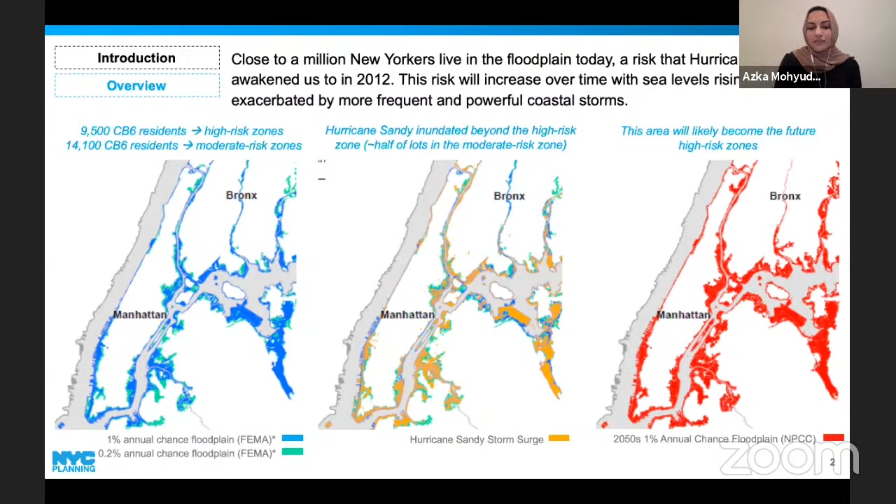I also want to point out that while this map is zoomed into Manhattan for the purpose of this presentation, and a lot of the references I'll be making will be in reference to CB6, this amendment is a citywide text amendment, and the city's floodplain is very diverse. And with that come very diverse neighborhoods and very diverse and unique challenges to stay safe. And this text amendment has to accommodate these varying neighborhoods. We have tried our best to focus primarily on the provisions applicable to CB6 in this presentation, but since the text has a citywide application and the board is asked to comment on the totality of the text, this presentation might show some building typologies that are not typical of Manhattan, like single-family detached homes.

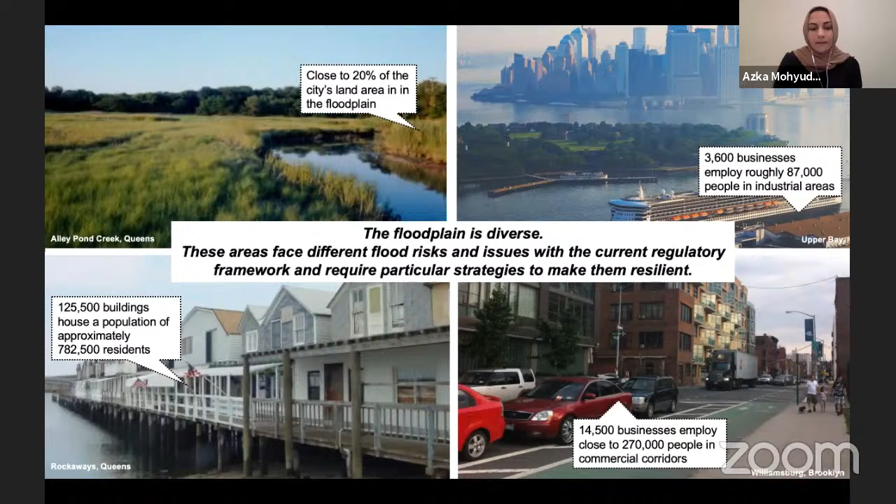The wide range of challenges that come with flood risk adaptation require a strategy that involves multiple lines of defense. So the city has some coastal defense strategies like the East Side Coastal Resiliency Project, which most of you are probably familiar with, as well as infrastructure improvements and emergency preparedness. However, these are all different portions of achieving the goal of resiliency, and this text only comes into play as it relates to buildings. So while it works in conjunction with other projects and other resiliency efforts, the text itself will mostly have to do with how to make buildings, existing and new, more resilient to flood.

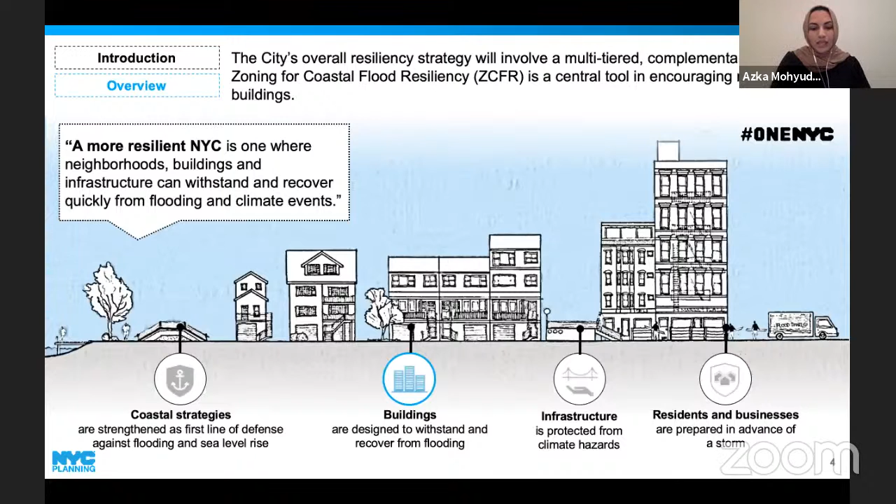For context, I wanted to show a brief snapshot of the buildings within the floodplain in CB6. These are mostly older residential buildings that would greatly benefit from the option to retrofit resiliency measures made available by this text. In order to understand exactly how this text promotes resiliency in buildings, we have to first understand the New York City Building Code.

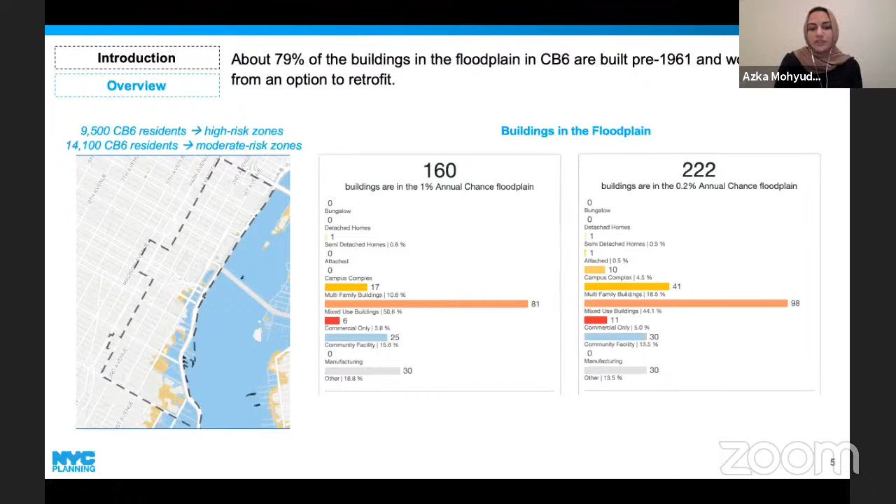So briefly, regulations are based on FEMA standards for buildings in the flood zone. And these regulations are located in Appendix G of the New York City Building Code. Compliance with such rules is generally required for new and significantly modified existing buildings constructed in the flood zone. The zoning resolution is an added layer that is meant to accommodate these regulations while also improving neighborhoods. So the two work together, but the requirements for how the buildings are made resilient lie within the New York City Building Code.

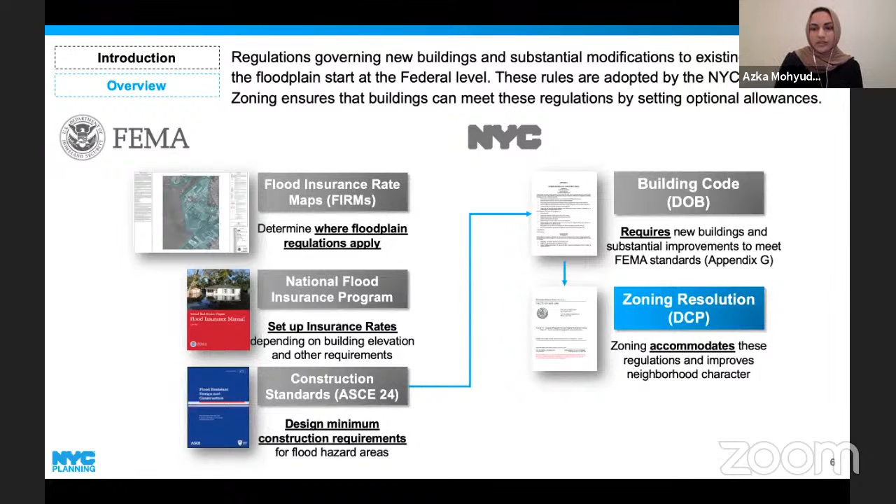So looking first at these building code requirements, they are based on the building's location within the flood zone and what the building code calls design flood elevation, or DFE, which can be seen in the blue dotted line here. DFE is the height that floodwaters could be expected to rise, plus additional freeboard or additional elevation for protection. For residential buildings, all living spaces must be located at or above the DFE, as you can see on the building on the left. Any spaces below must be wet flood proofed, meaning it is designed to allow water to flow in and out. Those wet flood proof spaces may only be used for parking, storage, and access. These buildings may not have any living spaces below ground.

For non-residential or mixed-use buildings, they can also make use of the wet flood proofing methods, but they also have the option to dry flood proof and locate some uses below the DFE. Dry flood proofing means meeting specific design and materials requirements so that water cannot enter the building during a flood event. This strategy allows uses to be located close to the sidewalk level, but it can be extremely expensive and especially challenging in locations with high water tables or high DFEs.

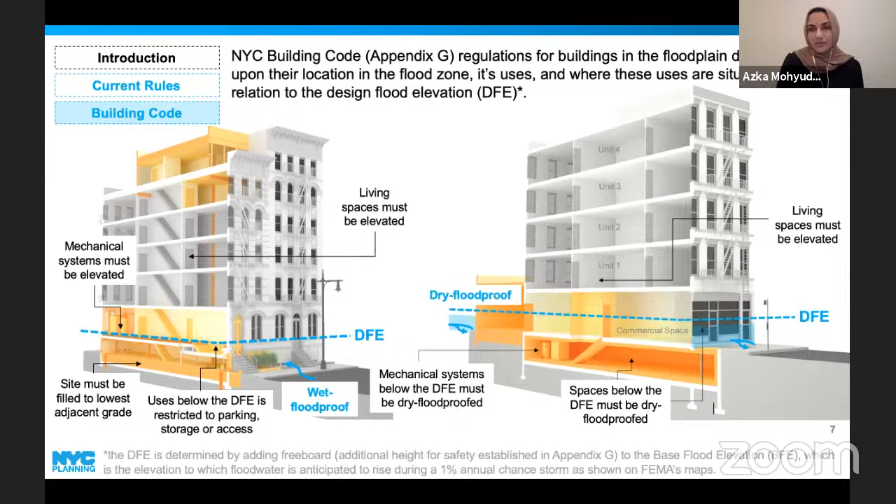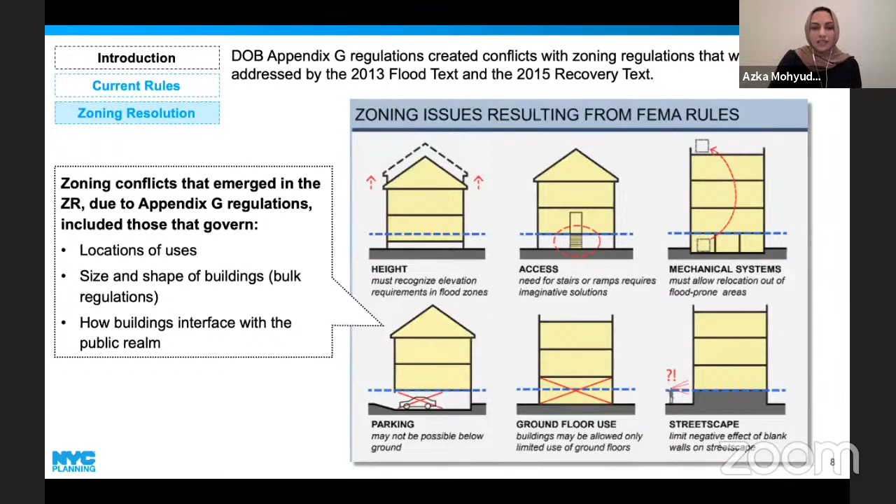These building code regulations became widely applicable soon after the storm, but posed conflicts with the zoning resolution in three main ways. Rules that regulate where certain uses shall be located, bulk regulations that govern the size and shape of buildings, and how buildings interface with the public realm. So this is where this text comes in. It is meant to build on the previous two zoning text amendments that were put in place shortly after Hurricane Sandy and remove barriers within the zoning resolution that make it hard for new and existing buildings in the floodplain to meet the building code requirements for flood-resistant construction.

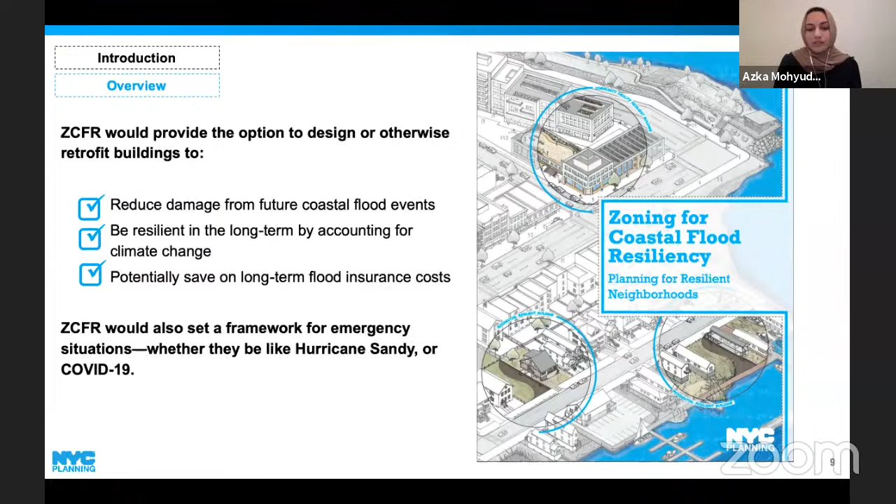Ultimately, zoning for coastal flood resiliency will help those living and working in the floodplain to reduce damage from future coastal storms, be resilient in the long term by accounting for future risks from climate change, and potentially help save on flood insurance costs. It would also assist with disaster recovery by setting a framework for emergency situations, including the present situation with the COVID-19 pandemic. The two text amendments that the city adopted post-Sandy on an emergency basis helped address these issues. However, these rules are already expiring. If these rules are not made permanent, it would hinder the protection of existing vulnerable buildings and disincentivize the resiliency measures in new construction, making our neighborhoods less resilient.

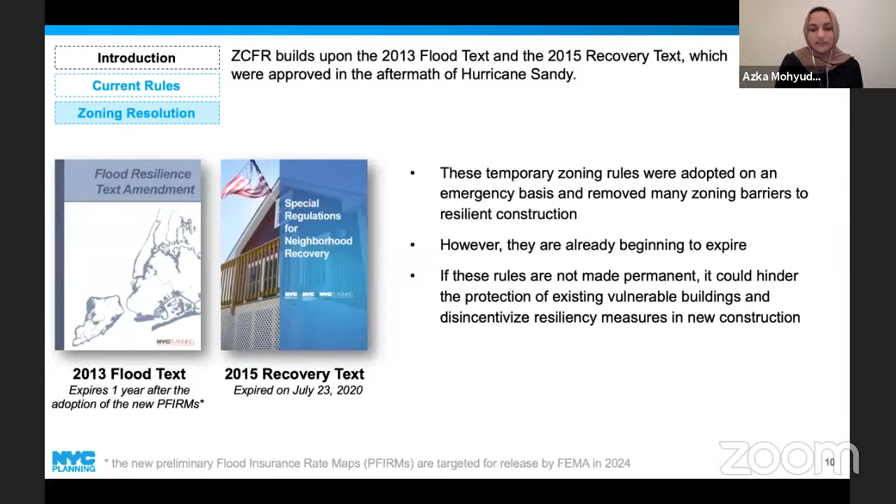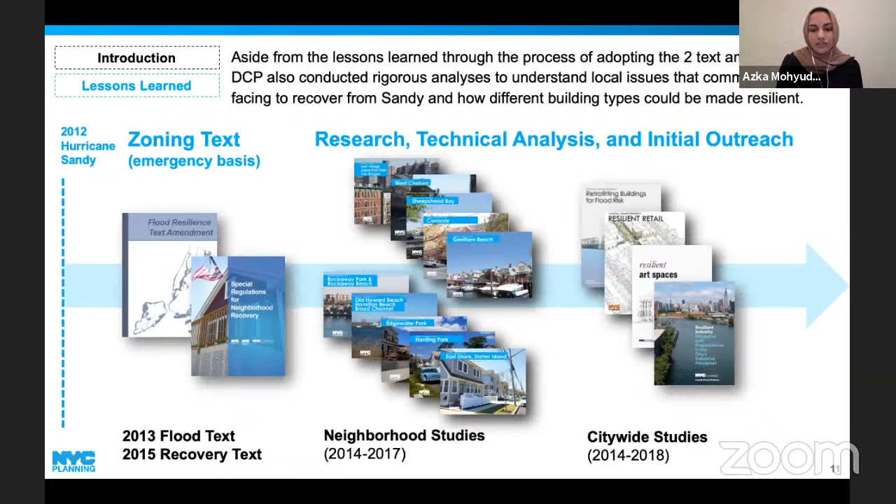Through several years, we conducted citywide research about resiliency strategies of different building types and studied 10 neighborhoods that were severely impacted by the storm. From this work, we gathered insights from stakeholders and partner city agencies, which helped us uncover additional zoning barriers to resilient construction. We took our public engagement further and briefed more than 3,000 stakeholders across all boroughs through different forms of outreach, such as presentations to elected officials and the technical community, community workshops, and other types of public events.

Our community workshops were key in identifying neighborhood priorities and individual needs regarding making buildings safe to coastal storms. Our goal was twofold. One, to educate the community on flood risk and the range of regulations that are required and available to them in the flood zone. And two, learn from residents and the technical community how they envision the buildings where they live, work, or help design being more resilient.

As a result of this extensive outreach, we have learned valuable lessons which helped inform the zoning for coastal flood resiliency text. We realized that our rules were predominantly focused on low-density residential areas. They mostly assisted buildings that can be physically elevated, such as detached homes. However, they were not enough in assisting residents to relocate all living spaces above the DFE or over-elevate the lowest floor above future flood levels.

Attached homes and multifamily buildings, such as the ones within the CB6 floodplain, were not sufficiently addressed since they must evacuate spaces below the DFE and relocate them on the top of the structure, a retrofit strategy that requires more flexibility. And businesses were also not sufficiently addressed as they need high visibility from sidewalks, but also because many heavily rely on cellars or on being at grade for operations.

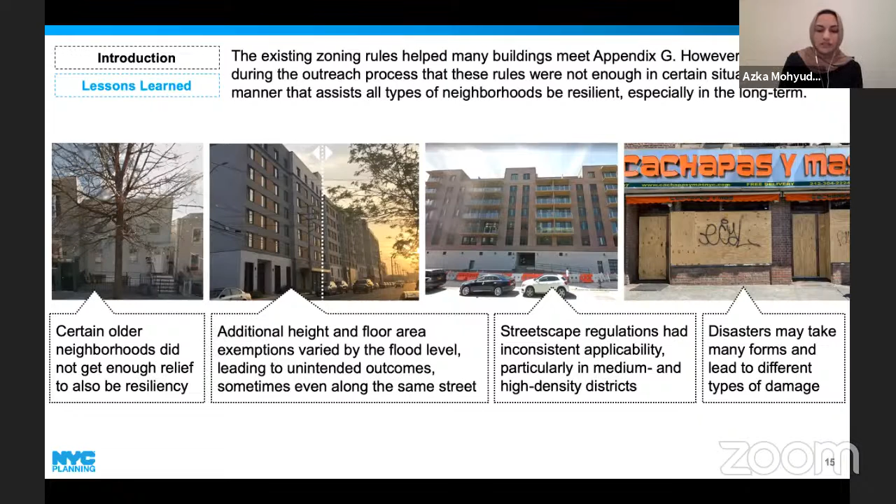Our streetscape regulations also had inconsistent and insufficient applicability, particularly in medium and high density districts. And lastly, we realized that there are rules that need to be readily available quickly after a disaster strikes. And so this text amendment could be one way to get closer to the city's overall disaster preparedness. These are all lessons learned since the flood text was initially introduced in 2013. Now I will briefly go through the proposal to describe how zoning for coastal flood resiliency addresses these issues while encouraging the city's buildings to be more resilient.

After a long process of studying the floodplain and engaging with so many stakeholders in the community on a wide set of issues, we were able to establish 4 overarching goals that help us move from Sandy recovery to a longer-term resiliency strategy. Number 1, the floodplain community wants to be able to prepare buildings for flooding, even if they're not located in what FEMA currently determines to be the highest risk flood zone. 2, people also want the option to raise living spaces higher than the current flood level that FEMA projects, because they have seen higher flood levels already and expect that risk to grow in the future with sea level rising, and therefore the expected flood level in the event of a storm.

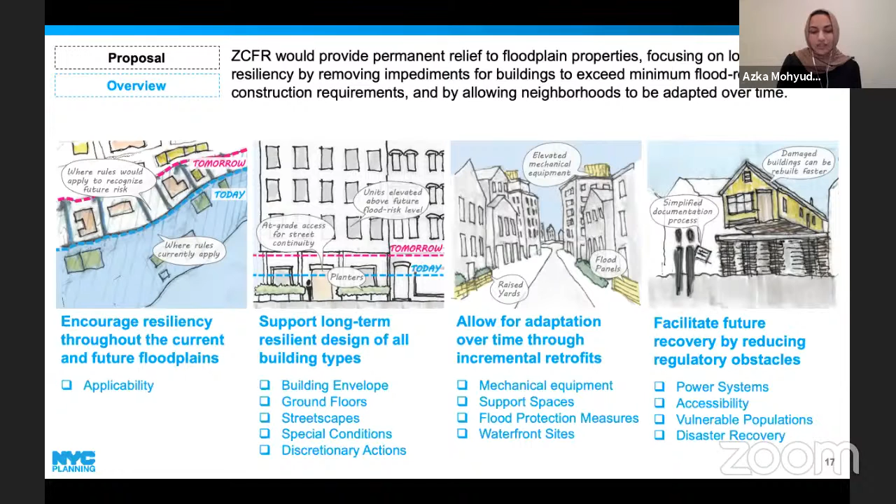Residents and business owners want to be able to invest in resiliency incrementally, so it's more affordable over time. They want options like moving their mechanical equipment to a higher elevation without necessarily triggering a requirement to raise or fully flood-proof the structure. And lastly, we know that we need a way for the city to be nimbler in responding to future events that might require rebuilding homes or other forms of recovery. So now for each goal, we will present a set of strategies to help achieve them and go over a selection of regulations that we are proposing, which are applicable in Community Board 6.

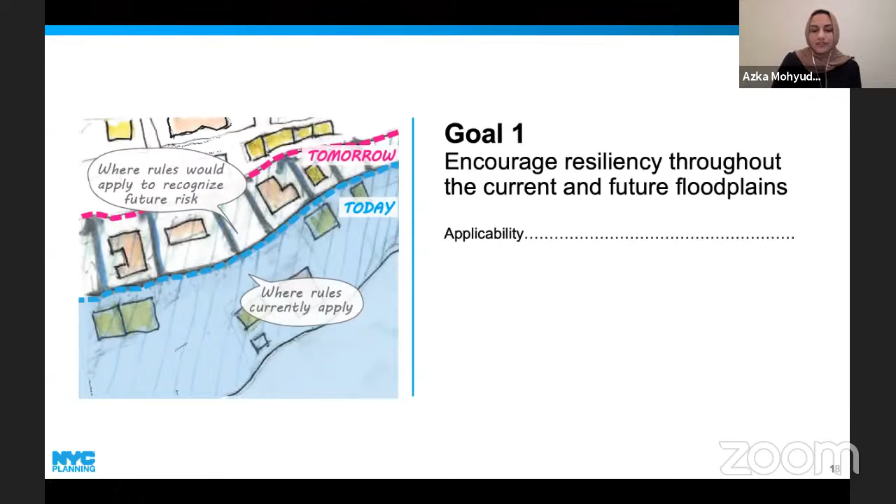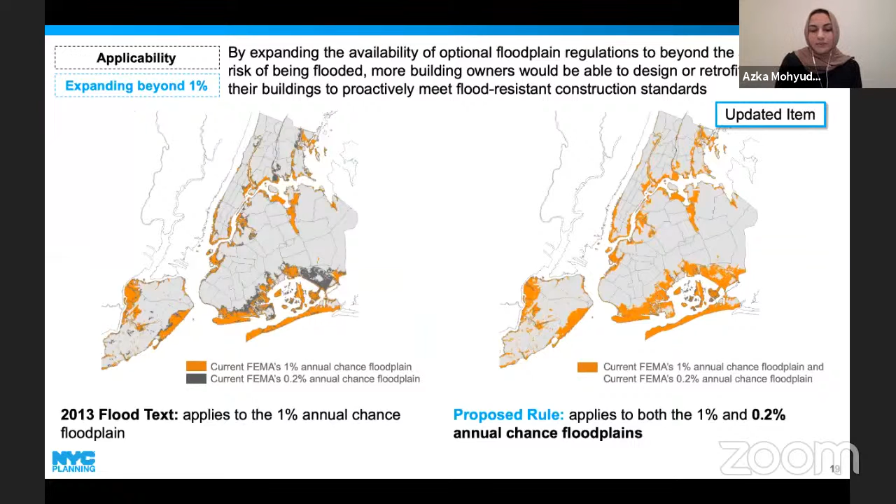Goal number 1 speaks more to where the proposed zoning text would apply. These regulations are optional to help buildings undertake resiliency improvements. ZCFR would expand the applicability of the current text to a broader set of buildings that are also exposed to flooding in the event of coastal storms. Any lot located within either the high risk or moderate risk floodplains would be allowed to use the proposed special options for resilient building design.

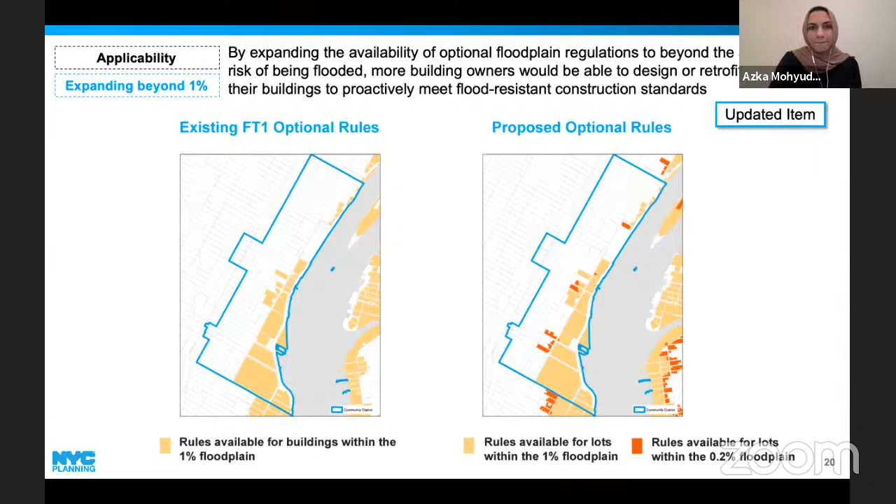This map shows what that means for CB6. The lots in yellow are where these rules currently apply under the existing flood text, and the lots in red are where these regulations are being expanded to. So these are where the floodplain is at 0.2% currently, but is expected to be at 1% by the 2050s. The second goal illustrates options that would be available only if the building fully meets or exceeds Appendix G of the building code. These are split into 5 separate strategies, but I will focus on the first 3 for CB6.

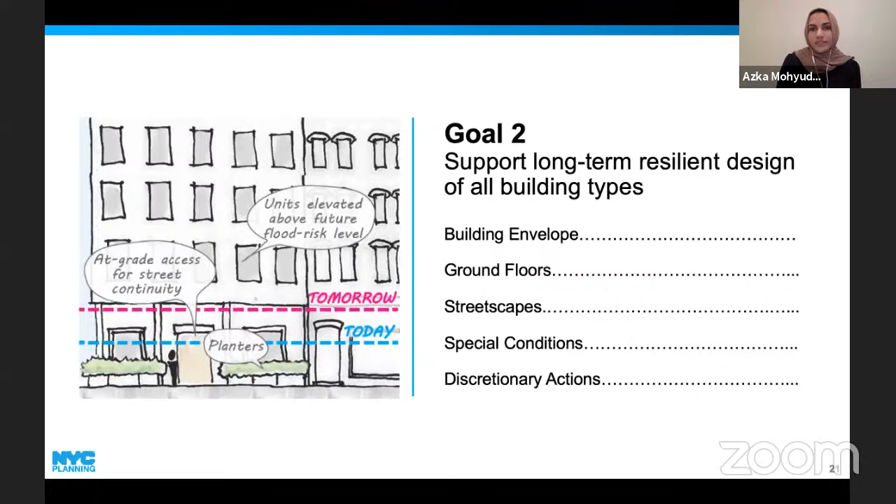More streamlined optional rules for how height is measured in the floodplain would allow building owners to physically elevate habitable spaces and other building support features above expected flood elevations so they are safe in the long term. Currently, the 2013 flood text already allows maximum height to be measured from the FRCE and allows extra height in situations where buildings are located in areas with certain high flood level elevations. This extra height allows buildings to have a more useful ground floor, and we learned that over time it also helps with long-term resiliency.

Today, building heights can be bumped to 9, 10, or 12 feet depending on the building's use and zoning district, making it a highly complex framework. And because its applicability depends on the flood elevation level, slight topography changes can lead to inconsistent outcomes on the same street of a neighborhood. The proposal would make those height allowances more consistent and equitably distributed by allowing heights to be measured from a new reference plane that can be placed up to 10 feet above grade in the 1% floodplain and up to 5 feet in the 0.2% floodplain.

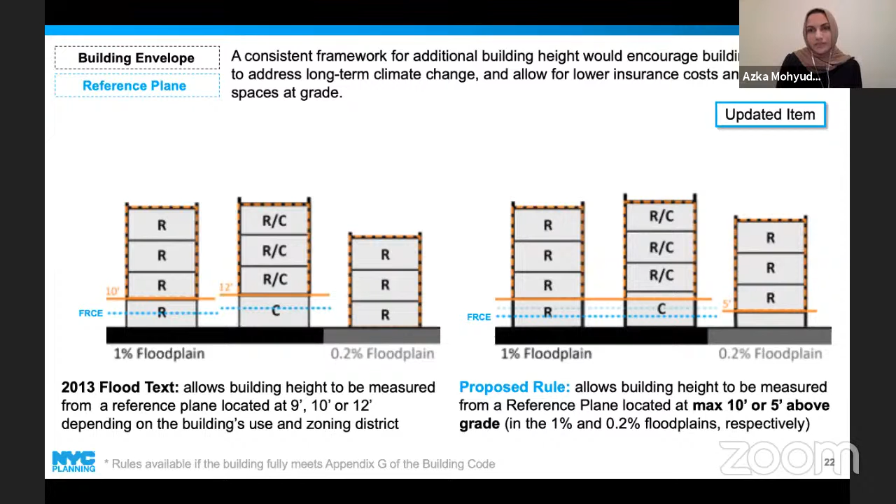This would also require that the floor level is placed at or above this reference plane to ensure that additional building height is tied to actual resiliency improvements, and it would close a loophole that currently exists for developers to get additional height without making the building resilient.

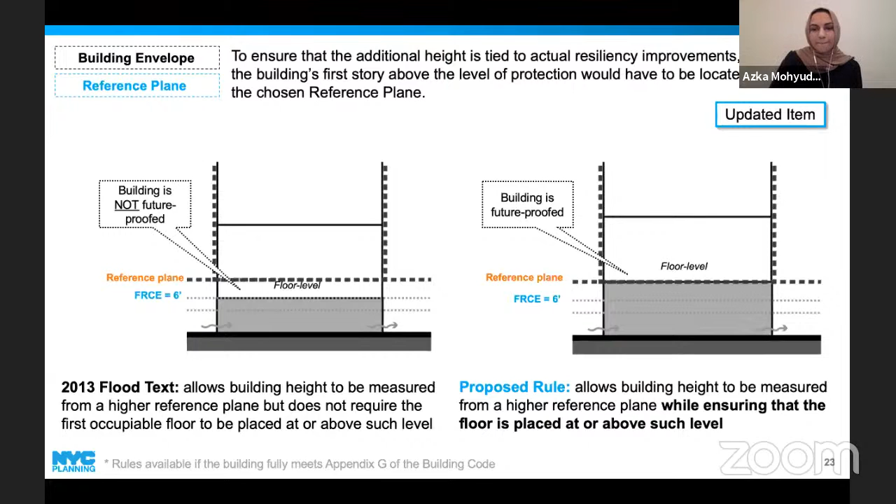To help promote safer buildings, good long-term resilient design and good neighborhood streetscape, the proposal would also make small changes to existing ground floor regulations. The proposal would allow existing floor area exemptions for spaces that are wet flood proofed to apply to both existing and new buildings, since these spaces pursuant to building code can only be used for parking, storage, and building access. This allowance helps buildings adapt to climate change.

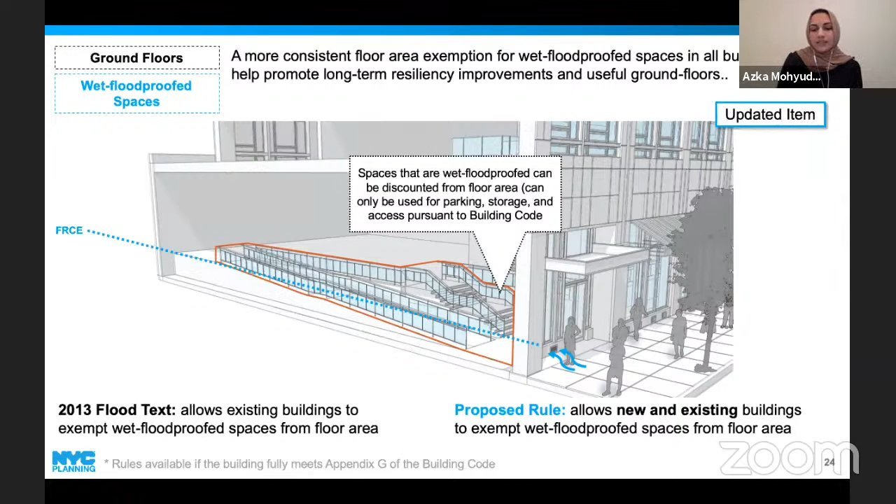The current rules also include floor area exemptions for spaces that are dry flood proofed to promote active uses at the street level. However, there are 2 sets of rules. On your left, you can see a provision that applies to existing buildings, which would exempt the entire dry flood proofed space. On the right, you can see a rule that applies to new and existing buildings, which allowed any space to be exempted from floor area if more than half of the floor is below the flood level. We call these spaces cellar. This rule was first implemented in 1989 and was then edited by the 2013 flood text to be even more flexible.

The problem with the cellar exemption system is that it allowed full floors to be entirely exempted without actually requiring the building to comply with resiliency standards. It also encouraged squished ground floors with low ceilings and sunken ground floors which are extremely vulnerable to flooding. Ultimately, these 2 rule exemptions ended up promoting buildings out of scale and ground floors that were less marketable and effective for active use.

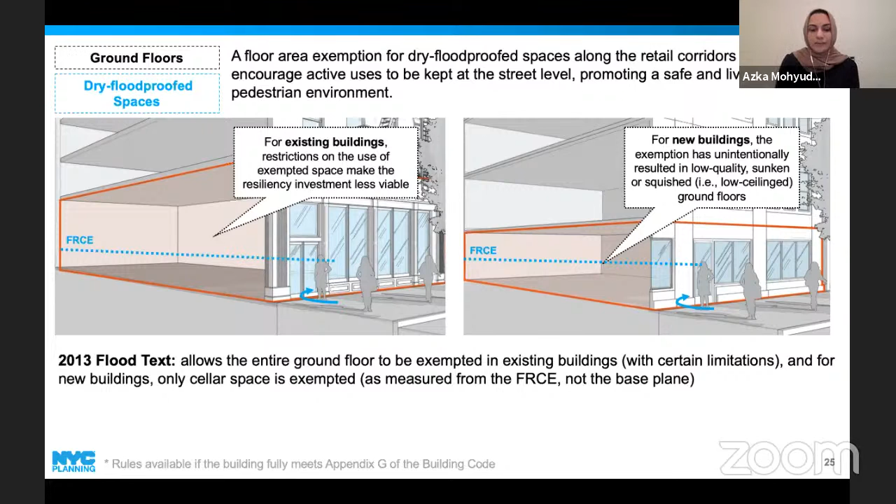This proposal would modify these regulations to reduce the amount of floor area that can be exempted to instead only allow the first 30 feet of a space that is dry flood proofed to be exempted from floor area, provided that the space is used for non-residential uses and complies with certain standard requirements such as minimum transparency and internal clearance. This would help encourage active uses close to the street and sidewalk and promote a safe and lively pedestrian environment while making sure that the resulting buildings are not out of scale. In addition, this proposal would mandate a set of streetscape requirements to improve the ground floor level design of resilient buildings.

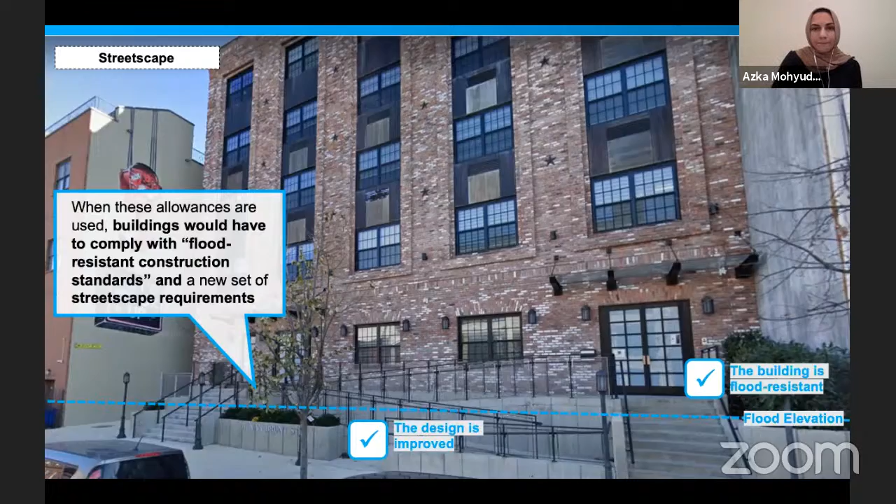Moving on to goal 3, these provisions are what we call partial resiliency strategies. They will help building owners to undertake incremental steps toward resiliency without requiring the structure or sites to fully meet Appendix G, which is cost prohibitive. This would be extremely helpful for the older buildings in CB6 to implement resiliency efforts over time.

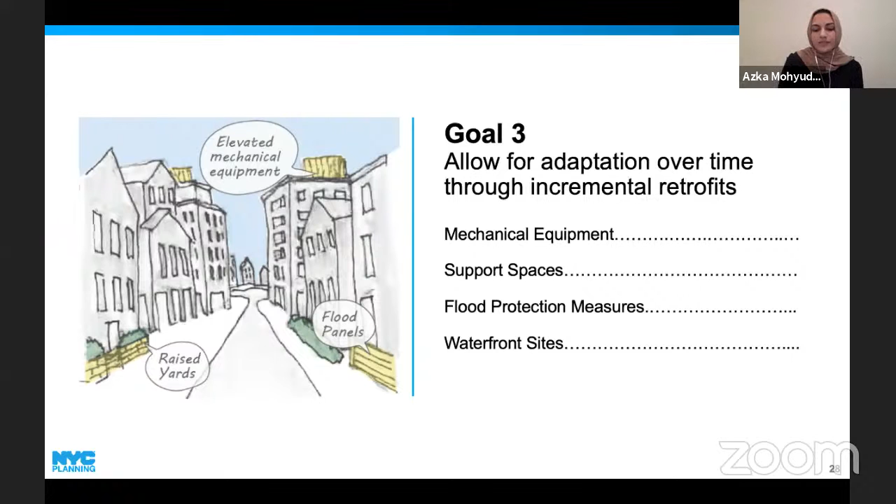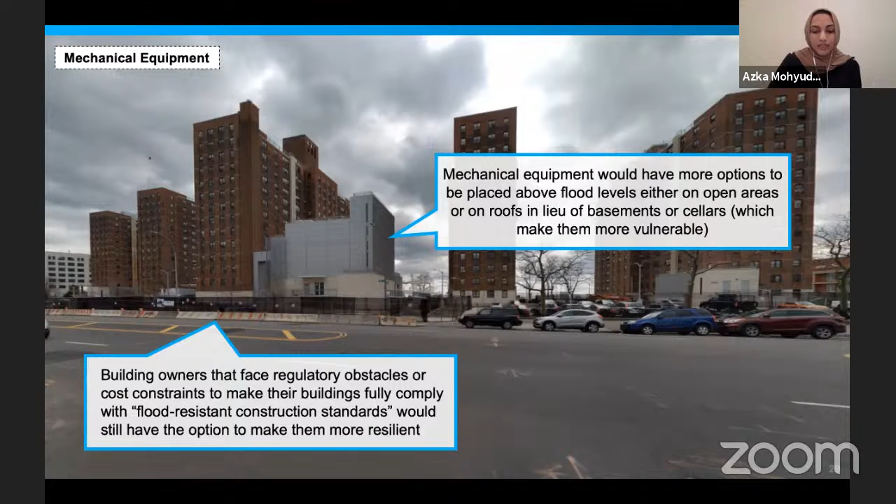We learned that raising mechanical equipment, often located below grade within cellars, is the first and most cost-effective step to make buildings more resilient. The proposal would continue to allow the relocation of equipment and enable more options for their placement above the flood level, either on top of roofs or in a separate structure, by considering mechanical equipment as permitted obstruction. As shown in this picture, this is particularly relevant for housing campuses such as Peter Cooper Village and Stuytown in CB6. And a big portion of the floodplain also contains businesses that offer either neighborhood services or are part of the large industrial economy of the city.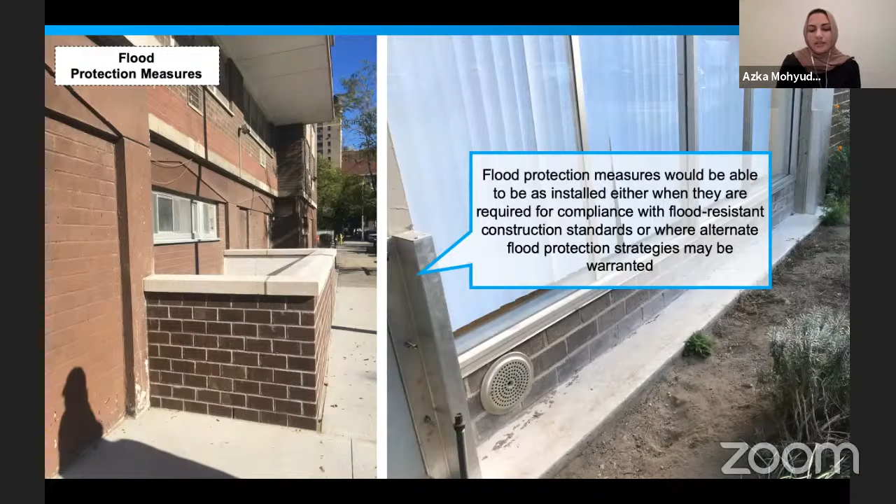Many of these buildings cannot be completely elevated or dry flood proofed due to cost or operational needs, but many of these business owners would like to raise priority spaces and equipment above harm's way so they can minimize business disruption in case of a storm event. This proposal would also enable different types of flood protection measures to be implemented. This would include allowances for flood panels and landscape berms to be considered permitted obstructions in open areas. It would also allow spaces used for the storage of panels to be exempted from floor area to enable on-site storage. Again, this is a cost-effective strategy that older buildings can implement.

Lastly, when looking at our waterfront sites, zoning generally does not allow waterfront yards or required visual corridors to be raised to account for flood risk. Many sites at the water's edge are also required to provide public access using specific design standards and have little flexibility to accommodate best resiliency practices. This proposal would offer more flexibility for the grading of these sites and would facilitate resiliency measures such as soft shorelines.

Now, I will speak about our final goal, which is different from the previous ones in that these rules would mostly apply not just in the floodplain, but on a citywide level.

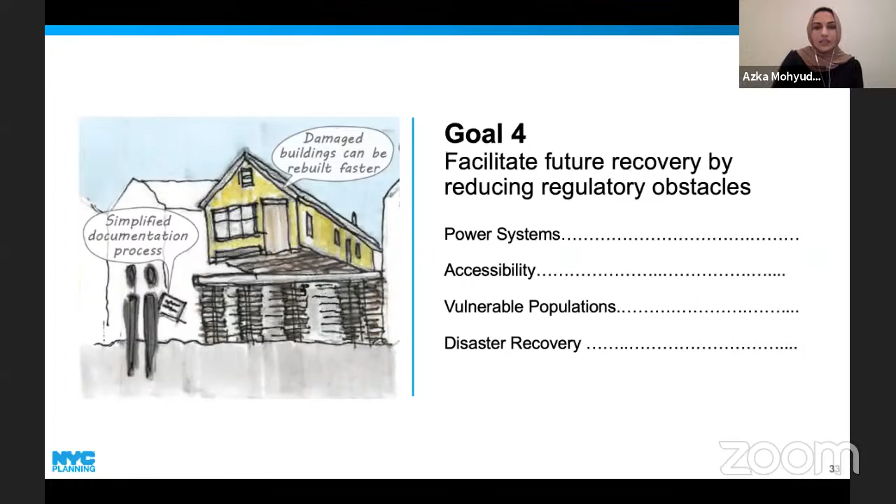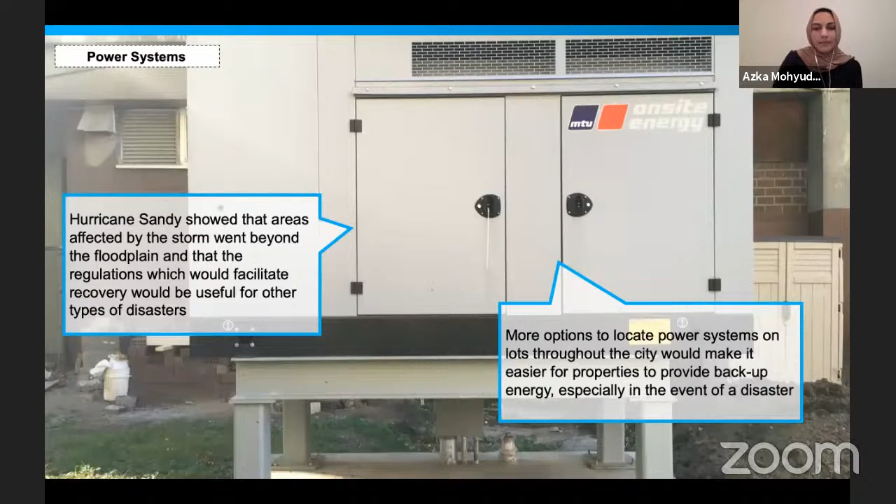Sandy showed us how a storm's effects can go beyond the floodplain, especially regarding issues with our energy grid. The proposal will therefore allow power systems, including generators and solar energy systems, to be considered a permitted obstruction in open areas across all zoning districts to facilitate their installation. In addition, to ensure all areas of the city can easily provide ADA access, the proposal would classify both ramps and lifts as permitted obstructions in all required open areas to facilitate accessible design.

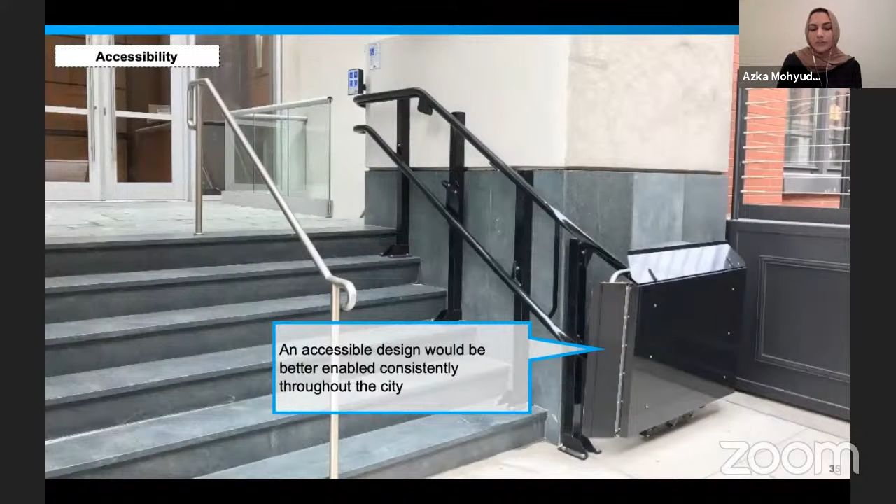Another important issue is how disasters, especially those that require the evacuation of residents, impact vulnerable populations. Hurricane Sandy and other storms across the nation have exposed the difficulties facing nursing home residents in areas of high-risk flooding. Nursing homes are licensed to house populations that require continual medical care, and research shows that this dependency can be strained whether nursing homes shelter in place or evacuate prior to a coastal storm. Therefore, the city believes it would be appropriate to limit the growth of nursing homes in high-risk areas to lessen the health consequences and logistical challenges of evacuating the residents of these facilities.

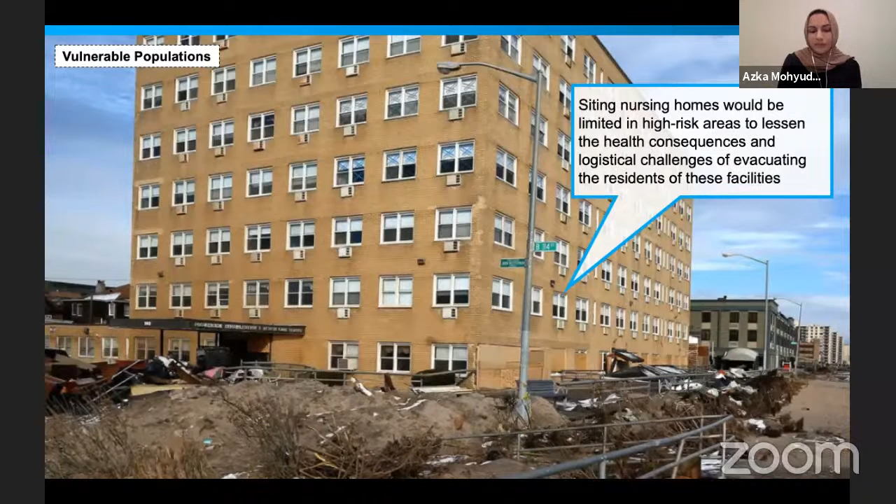The proposal is not citywide and would only prohibit the development of new nursing homes within the 1% floodplain and other selected geographies likely to have limited vehicular access during a storm event. I want to emphasize that existing facilities would still be able to conduct enlargements for modest improvements, including those that help with resiliency.

Lastly, Sandy showed us that a lengthy process to update zoning regulations can slow disaster response. The proposal would make certain recovery provisions available to be enabled quickly following future disasters, and some of these provisions would be implemented now to help address the COVID-19 pandemic and its associated economic effects. Considering the situation we are going through right now with COVID, the proposal will be triggering two sets of rules that help provide a more predictable, longer-term method to administer the current recovery efforts.

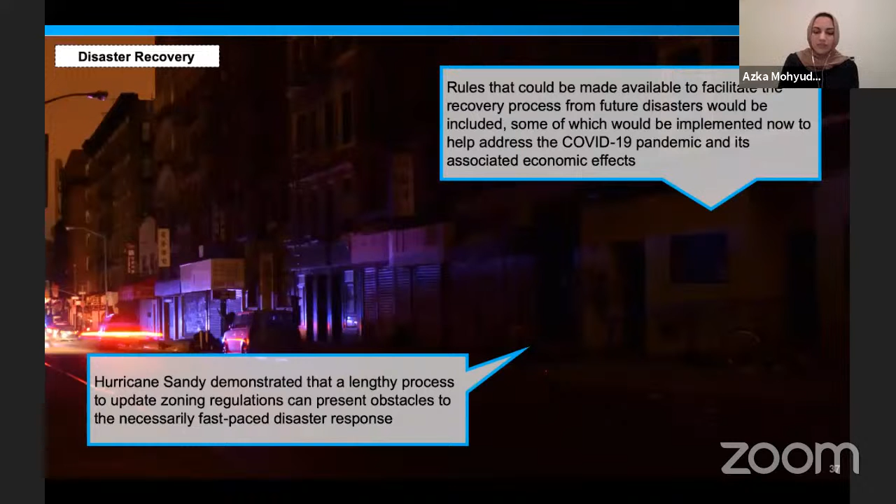The first one allows uses that do not conform with our use regulations to come back to business even if they're discontinued for more than 2 years, which is the current limitation on allowing non-conforming uses to come back. The other rule would give applicants that are running out of time with special permits and authorizations that came to the CPC for approval an additional term so they can complete their original plan of construction. These rules would assist with the medium-term recovery from the pandemic's impacts to the economy.

In terms of next steps, the citywide text amendment was referred out on October 19, 2020 to all 59 community boards and borough presidents for 60 days. Then it will go to the CPC and City Council before adoption. More information about the project, including an annotated version of the proposed zoning text, can be found at DCP's website. This concludes the presentation about the proposed changes. Thank you for allowing me the time to update you on this important text amendment, and I would be happy to take any questions.

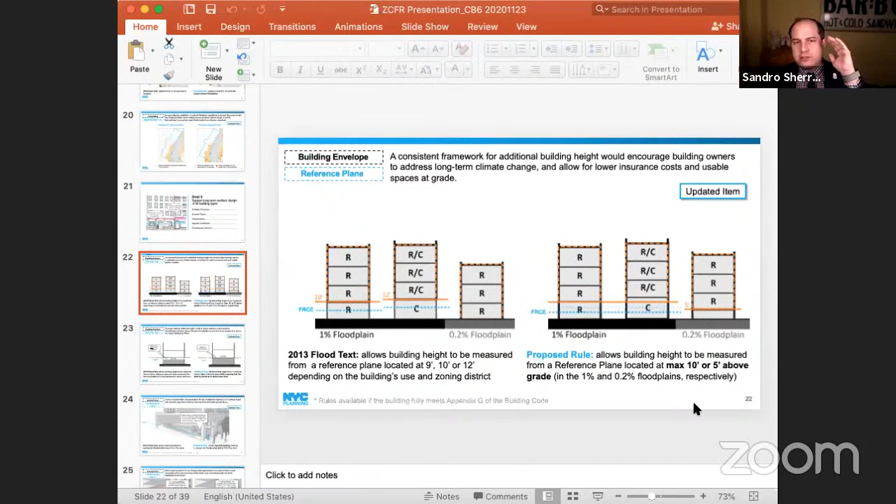So just so I understand, hypothetically, if a development had 10 buildings, 3 of which were damaged in the last 10 years during a flooding incident, what does that mean? That all or part of the mechanicals, because maybe all 10 are within the 1% zone, could be reconfigured to be on the roof, improving the flood resiliency, but then bypassing other concerns like sight lines and that sort of thing?

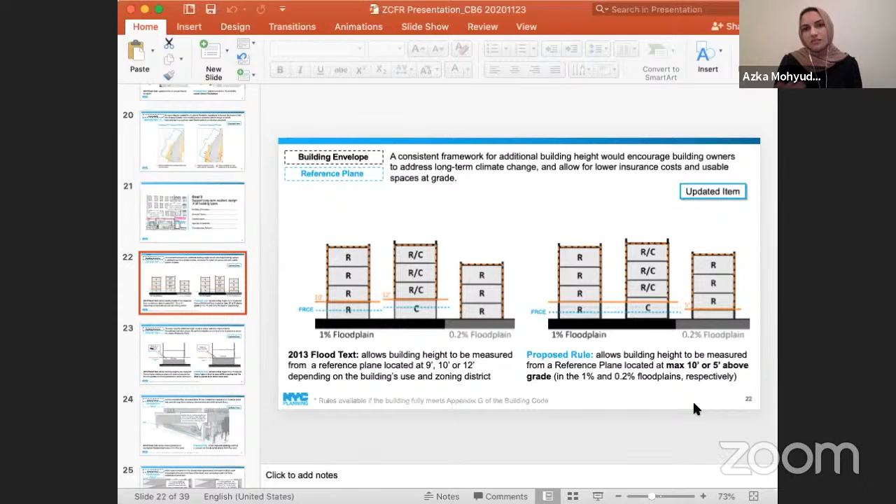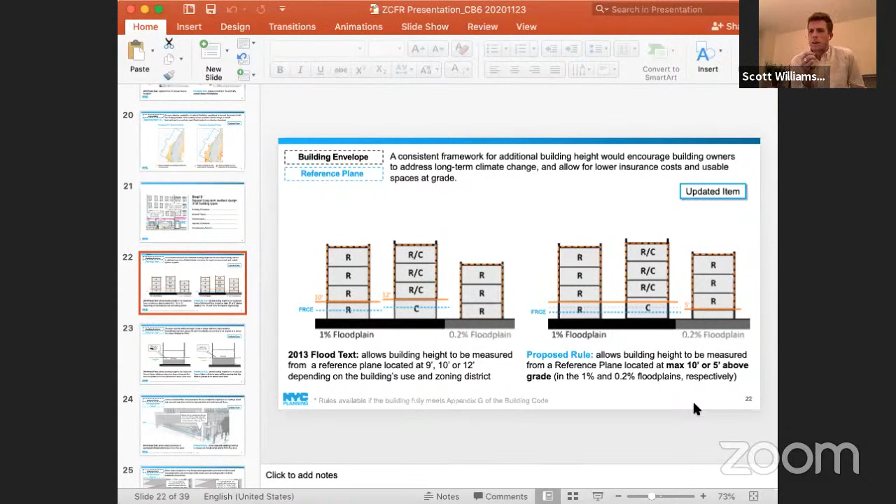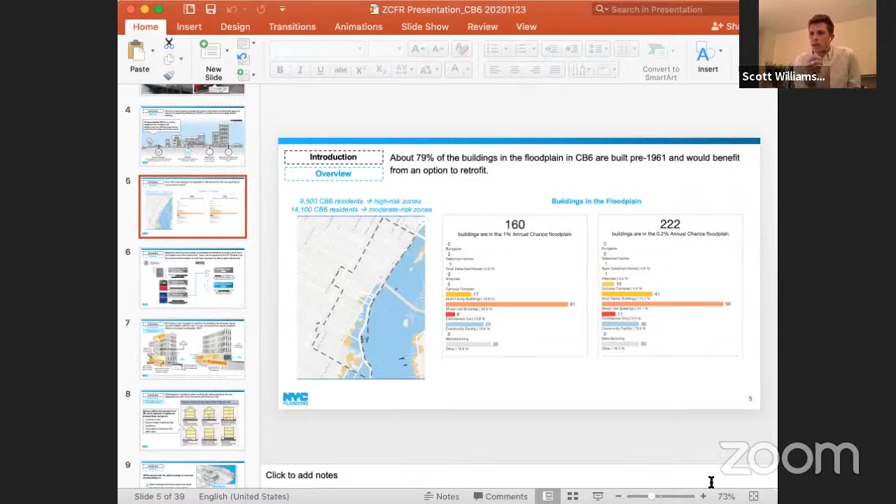If you could go to slide 5, I think that probably shows a map of what I'm hoping Sandro was talking about there, where, you can see, and I'm sorry, that's somewhat small. You can see that, say, Stuytown is only partially affected on the flood map here. Right. So your question is, do all the buildings benefit from this text amendment, or only those that are actually identified within the floodplain? Correct.

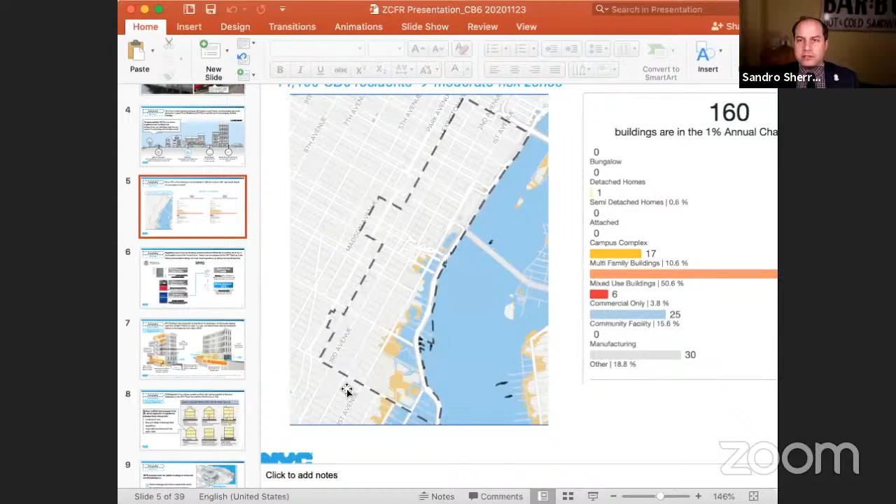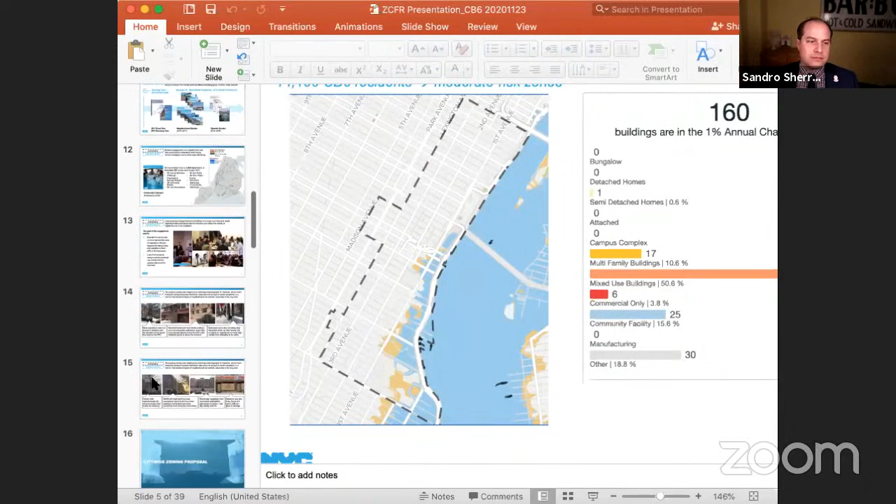Yeah, so once the zoning lot is impacted by the flood maps, the whole zoning lot is able to benefit from the text amendment provisions. Thank you very much, Scott. I think slide 20 actually has the better map, that you don't have to zoom in on. Yeah, so this one shows the lots themselves that are able to use these proposed optional rules.

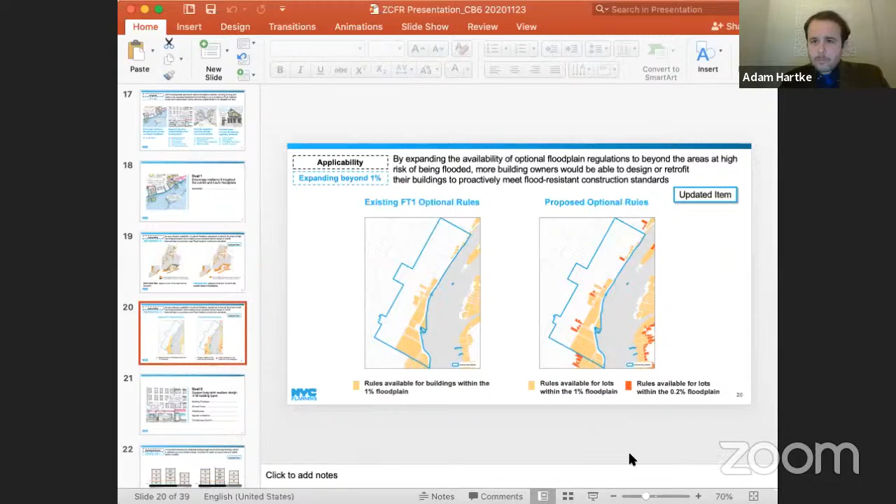Thank you. Thank you. Wells, the floor is yours. Can you hear me? Yeah. Oh, sorry, because I had audio issues earlier.

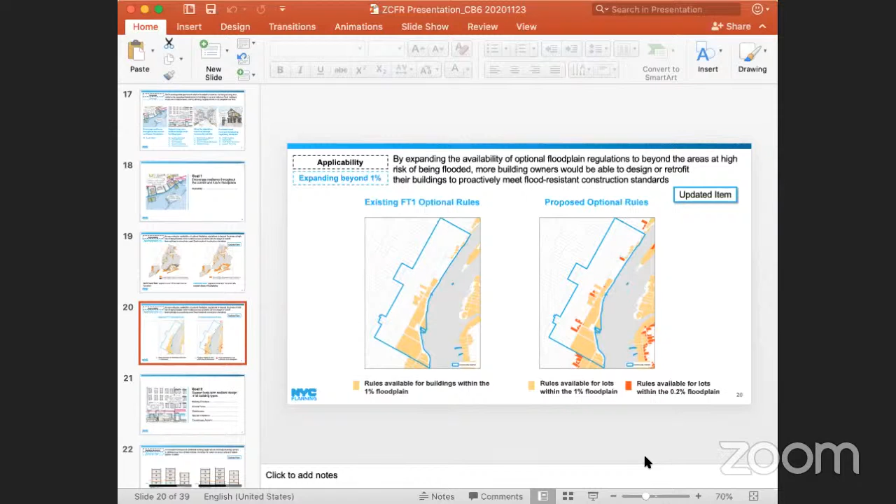Okay, so I have a follow-up question on slide 22. This may have been answered, but I just have a clarifying question. So in the 1% and the 0.2% floodplains, which I assume corresponds to the 100-year and 500-year floodplain elevations, in your proposed rule, you're saying that the new reference plane would be either at a max 10 feet or 5 feet above grade. So that implies, based on the parenthetical, that it's a max 10 feet above grade in the 1% and a max 5 feet above grade in the 0.2%, respectively. Is that correct? Yes, that's correct.

And in the previous text, in the 2013 text, the reference plane at 9, 10, or 12, is that also measured above grade? Yeah, so previously it was 9, 10, or 12, depending on the building's use and the zoning district. So it wasn't consistent across all buildings, and there was no reference plane for the 0.2% floodplain. So now the proposed text would have it at max 10 feet for 1% and max 5 feet for 0.2%. Okay, thank you.

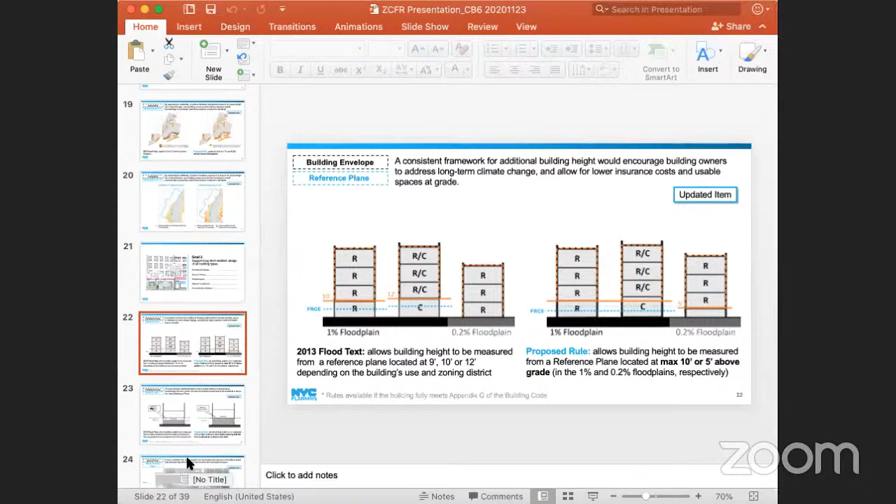Okay. And the floor is yours, and then we're going to move into public comment. Okay, I think I'm unmuted. You muted yourself, Anne. And you muted yourself. Sorry about that. Yep, I think I'm here now. Sorry about that. Okay, good.

So my first question, I do have two, but I think they're both quick. One of them is building on Kyle's question, which was one of my original questions, which is there are issues around the city with people wanting to build supertalls, and they are kind of abusing the use of mechanical spaces to make buildings taller. So they say, oh, we can't have them in the basement, so we put them at this location. But instead of it being an 8-foot floor, it's a 20-foot floor,

so that their buildings are even taller. And I'd love to know if there's anything that can be put in this to ensure that those mechanical spaces that are above ground are not abused. And maybe that's kind of already in there, but I just know that this is something that's happening. So I'd love to watch out for that.

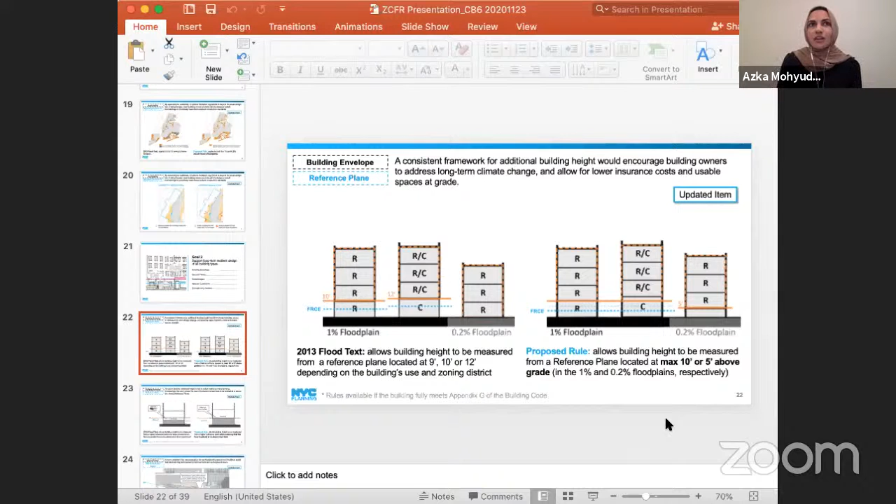Yeah, so for your second question, let me just go to the slide really quick. Okay, so these incremental retrofits that the text is allowing for are limited in what it is permitting. So it has to do with mechanical equipment, or it has to do with support spaces and flood protection measures. And through our extensive outreach to the other agencies within the city as well as the community, we have found that these specific issues were actually hindrances to complying with the building code.

So a lot of this stuff already exists in the building code, but the zoning was kind of creating a hindrance in applying them rather than allowing them. So it's not something that we are necessarily permitting out of nowhere, but it's something that has been existing, but was just creating some administrative issues and some issues in terms of how long it would take buildings to actually retrofit within the development timeline. So this just eases some of those restrictions. Is there a way to clarify that so it's not kind of an undoing of a regulation, something else?

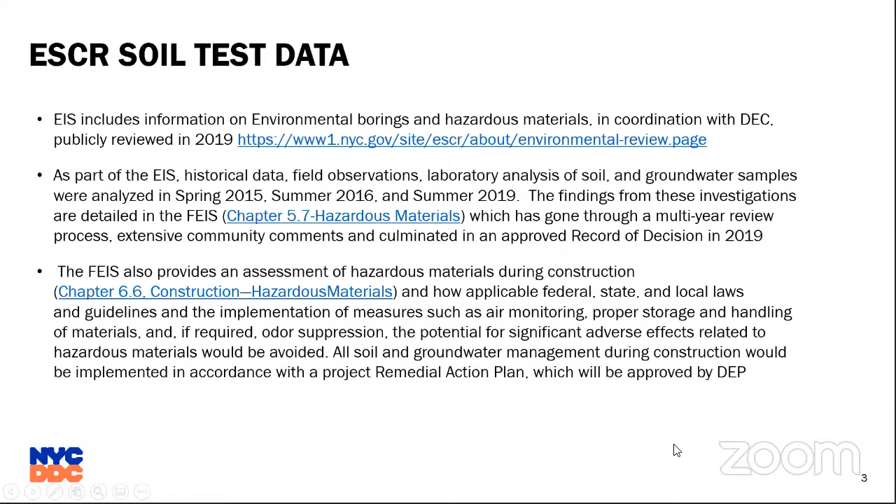So as mentioned, here are a few links on the soil test data. So you could take a look at those, and please feel free to reach out should there be any questions. However, this is where kind of all of the information is held.

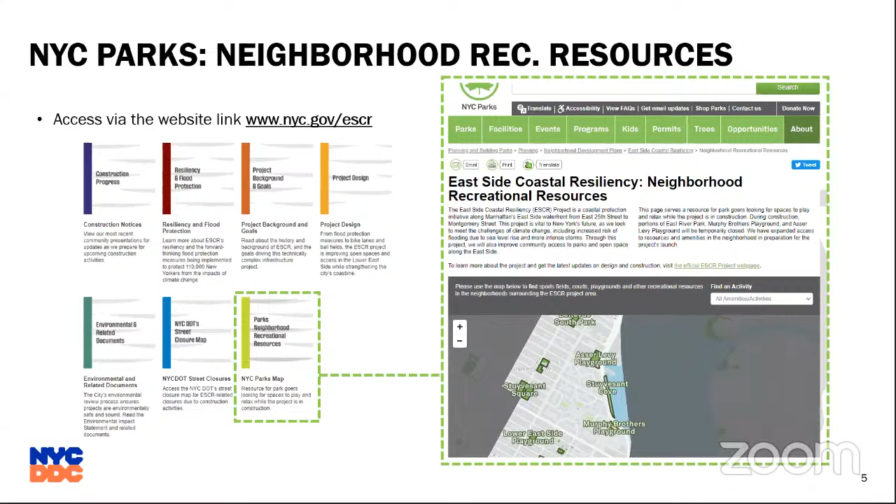We also have included a link to the New York City Parks neighborhood recreation resources on our cover page. Leah, if you want to advance. Perfect. So if you go to the home page, there are several kind of quick links once you scroll down a bit, and the Parks Neighborhood Recreational Resources is there, and it will bring you directly to the New York City Parks website, and you could browse through the interactive map of recreational resources.

So just to familiarize everybody with the kind of advisories or the communications materials that we have sent out in the past 2 or so weeks. The first one was the community advisory that announced the work beginning in the PA2 project area around Asser Levy Playground and in the Solar One facility. So community advisories will be issued as needed depending on the work that's going on for the project. So milestone activities or certain shutoffs, et cetera, will be kind of blasted through a community advisory.

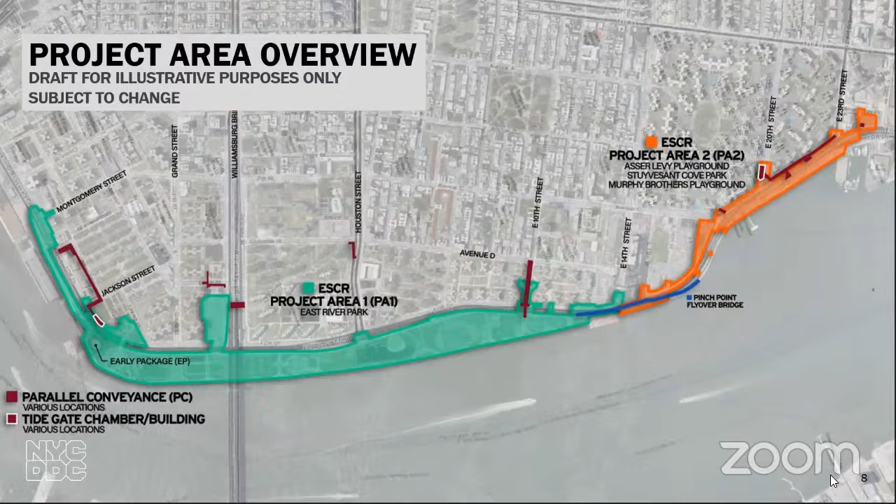So I'm going to hand the mic over to John Lynch from our HNTB LiRo team, who is managing project area 2. Okay, thanks, Desiree. Everyone can hear me, I assume? Yep. Yes. Okay, thanks, Desiree. My name's John Lynch. I've been here before. I'm the senior construction manager for the PA2 contract, working with DDC Construction on the administration of this contract. So I'm just going to give a brief update. A lot of these slides we've probably seen before. This is the project area overview slide that just shows the PA2 contract, which is in construction as of November 16th, when the notice to proceed was given.

You can go to the next slide. Wait a second. Did we go backwards there? Sorry. Yeah. Go to the next slide.

Okay, so project area 2, like I said, notice to proceed was given on November 16th. We have a contractor on board. The first areas of work will be Asser Levy Playground and the Solar One area. Asser Levy Playground, they were putting up fencing to close the park, keeping open the track and handball courts as stated. And then the next area will be Solar One. We're still working out the details on where that fencing is going to be with our contractor. We go to the next slide.

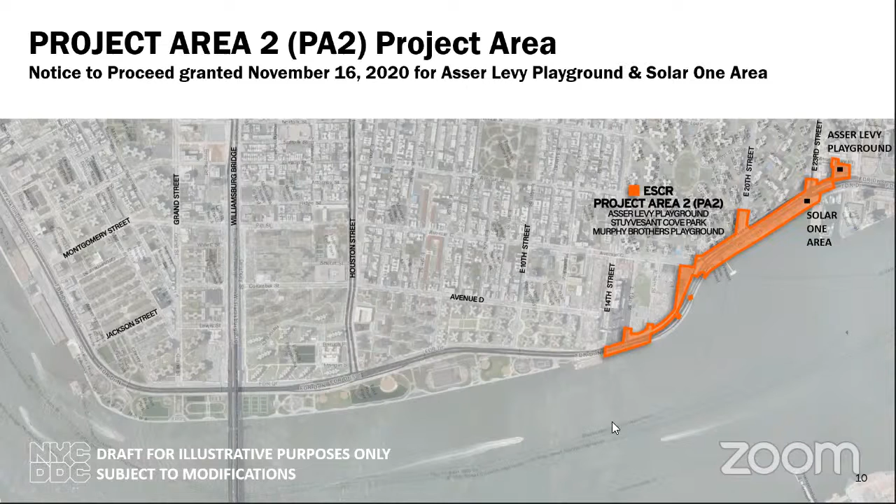Okay, great, thanks. So anticipated schedule, upon notice to proceed, we're going to see submittals from our contractor. And so this is just kind of a timeline of what's going to happen in November and December. As I said, we'll have fencing around the Asser Levy Park. We had a walkthrough with Parks, I guess a week and a half ago. And then Solar One area where we're going to build the flood wall there. We're working out that. When Solar One closes the bikeway, we'll be rerouting the greenway signs for the bikes coming from the north and south.

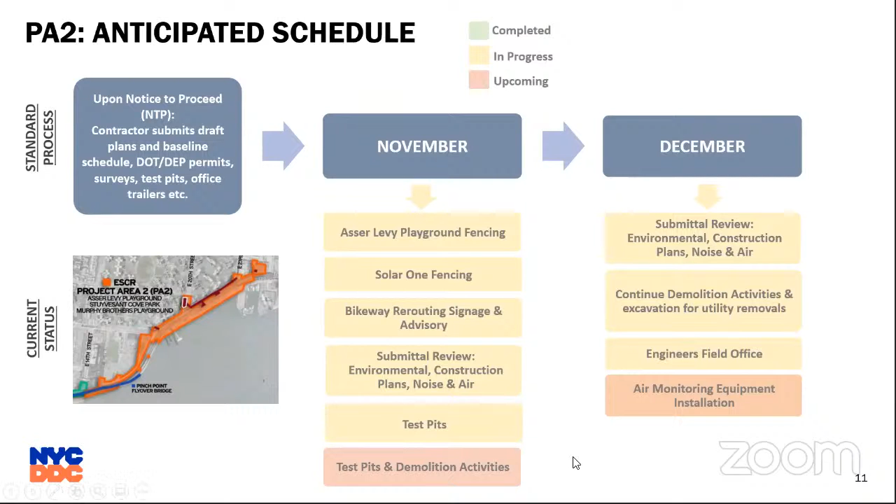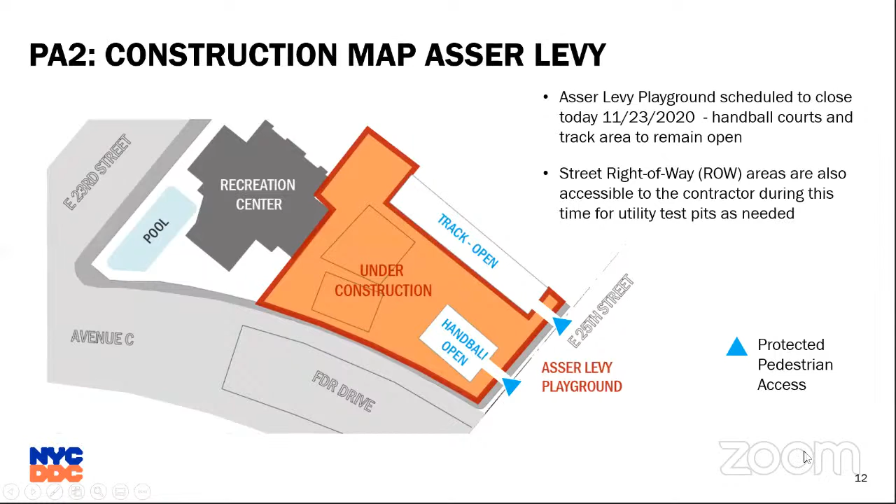You can see where the access is from 25th Street to utilize those facilities. Okay, we can go to the next slide. Hold on. Tagging along here.

Okay, so just to talk a little bit about Solar One. A little bit of the fencing has gone in, but we're still finalizing where the fencing is going to go. So we're coordinating for pedestrian access. We will not close the greenway before Thanksgiving. Our contractor's still reevaluating how they're going to do all that work, and we'll issue an advisory in advance of the bikeway closing down.

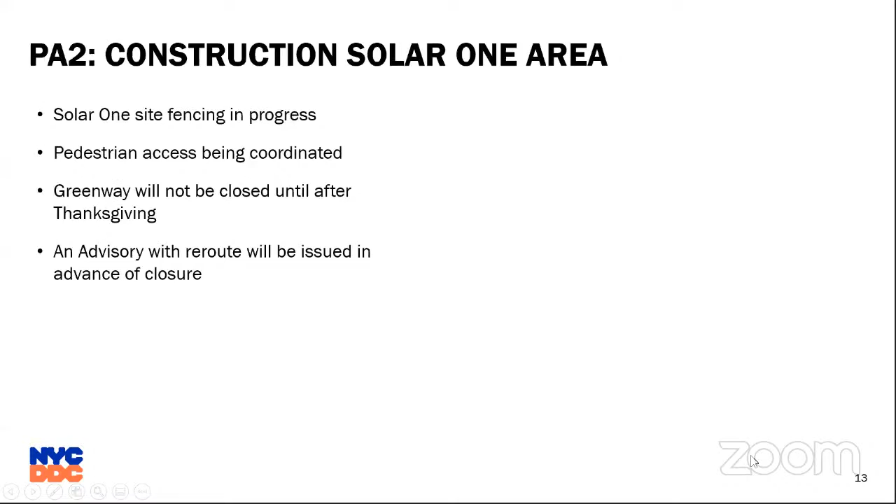Okay, we've seen this slide before, I think, but this is just the idea of having phased construction. So we're allowing access to Asser Levy Park in 2020, Stuyvesant Cove in 2021, and then Murphy Brothers Playground in 2022, so that we don't close all the parks at the same time. And Stuyvesant Cove Park itself is going to be phased half at a time, so that way we keep half that park open at all times to complete the wall and parks.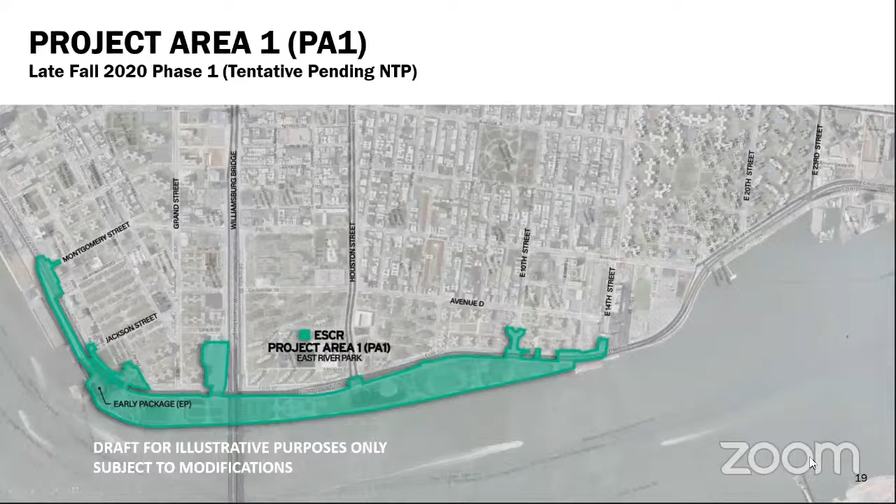the East River Park. John, it sounds like you're breaking up a little bit. I'm not sure if other people are hearing that, but he's breaking up a lot. It was totally unintelligible. Okay, I'm not the only one. John, are you still there? I think he might have dropped off. Oh, goodness. Okay, well, I could take over until he... Desiree, can you hear me? Oh, there you go. Here we go. Yeah, I sat through like an hour and a half, no problem, and then as soon as I start speaking, it gets dropped out. So sorry about that, people. Anyway, I'm not sure when I dropped off, but this Project Area 1, we can go to the next slide. That was unfortunate. I apologize.

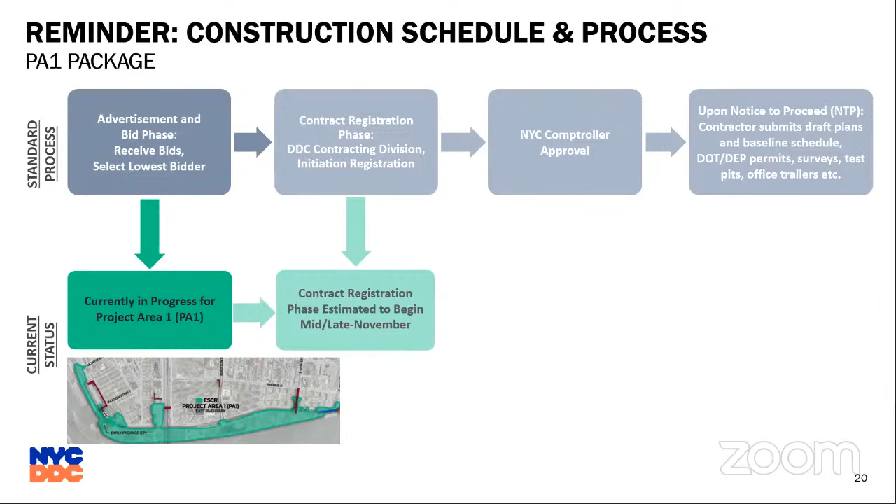Yeah, so just want to highlight East River Park will remain open for the rest of 2020. And then the first closures will be in early 2021. And that park is phased to keep about half of it open at all times with amenities. We can go to the next slide. Okay, with that, I'm going to turn it back to Desiree for community engagement and Section 3 MWBE. Thank you very much. Thanks, John.

So just a reminder in the community outreach during construction process, with any updates we have, we first reach out to our elected officials, then we notify the CAG and the community boards, and then we push the notifications through the CCL's website, social medias, etc.

And then while that is happening, we have this ongoing Section 3 and MWBE outreach. Trang will speak a little bit to that. Again, the contractor just recently came on board, so now is when we will be starting the conversations with him. And like I said, Trang will talk us through a little bit those kind of steps in the Section 3 and MWBE outreach.

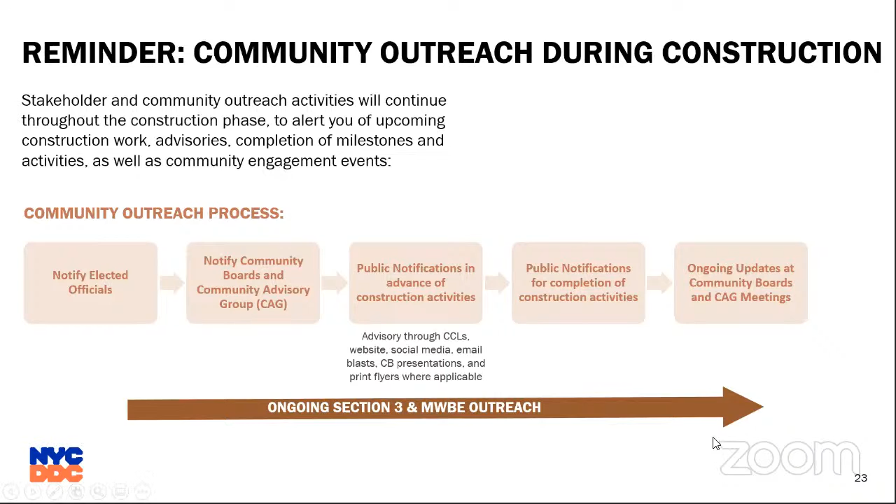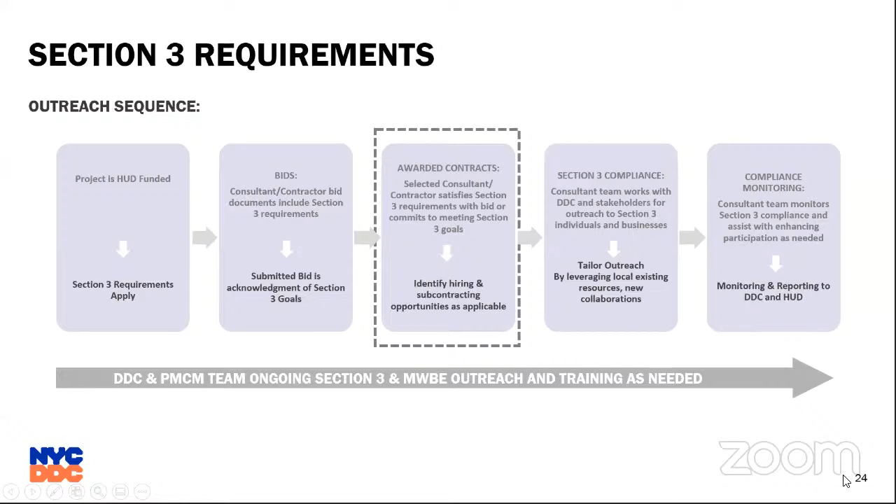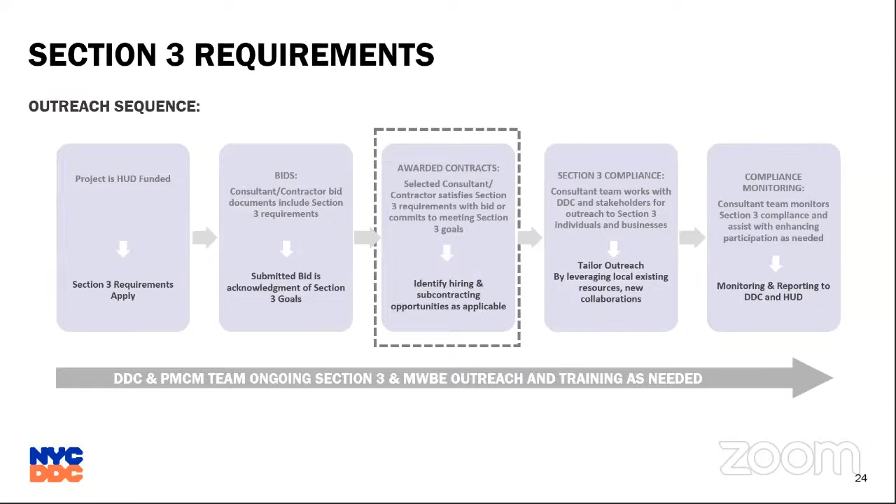Trang Bowie from Bowie Studio, an MWBE and Section 3 firm based in the Lower East Side. So this is an updated slide with the sequence for outreach of where we are right now. And as John and Desiree mentioned, the contractor just came on board now. So in the next couple of weeks, we'll be starting to look at their MWBE utilization plan and their Section 3 plan for recruitment and hiring. And we'll be starting to post updates on positions and procurement opportunities, if any, come out of these meetings. Next slide.

So this is an updated slide on the Section 3 requirements. We've gotten a few inquiries on the details of exactly what the requirements are and how Section 3 firms and Section 3 hiring is defined. So I just wanted to drill down a little bit more on this. All 4 contracts of the ESCR project are HUD funded, so they are all subject to the Section 3 goals.

And in the past, we've focused a lot on the requirement for 30% of all new hires be Section 3 individuals, but there are also 2 other components of the goals. For non-construction contracts, there's a 3% goal of going to Section 3 businesses, and then for construction contracts, 10% are targeted for Section 3 businesses. And as a clarification, the Section 3 requirement is not an entitlement program, so there are no guarantees.

When we post positions and procurement opportunities, they will have the same requirements and minimum qualifications for individuals and firms to make sure that they could perform the work and have the ability and capacity for the project or the positions.

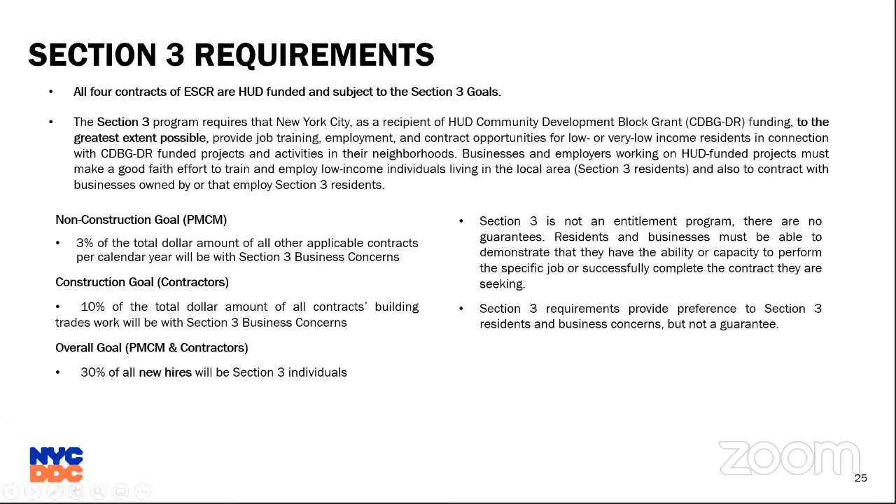We're very committed to making these goals, and part of the process of recruitment is also job training and contracting opportunities, so we can prepare individuals and firms to respond to these bids as they come up. Next slide. I think you've seen these before. They're just definitions on how firms are considered Section 3 businesses and income ranges for Section 3 individuals.

Next slide. And on our outreach events and communications for MWBE, we'll be working with DDC's Office of Diversity and Industry Relations. They have a very robust program with existing mailing lists, industry relationships and relationships with other agency partners. So we will coordinate with them on events and email blasts for future hiring and procurement opportunities. And on the new website that we've posted, there is a section for working with us that you could click on under the contact tab. Next slide.

These are just more Section 3 resources if you wanted to get more details. And the first link actually takes you to the New York City site to explain how Section 3 rolls up into city projects that receive funding from HUD. Next slide. You've also seen these before. These are other MWBE resources.

And then on the next slide, we have events, and one of the largest MWBE events is coming up in the first week of December, and registration closes this Wednesday. HNTB has also finished their 3-part webinar on how to do business with them, and the link on our website will give you access to these event recordings. And then lastly, there's a link to NYCHA's opportunities page, so individuals and firms can look at resources and opportunities that are available there. And I think that takes us to the last slide, Desiree.

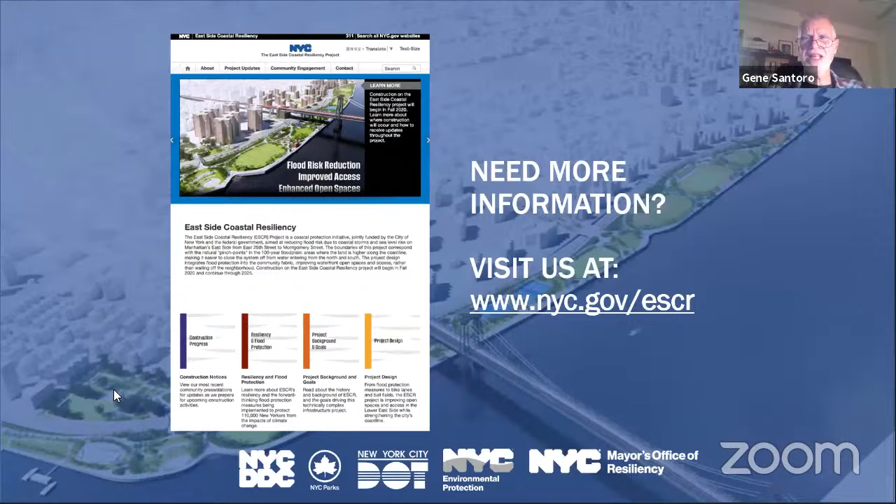Hi, thanks for the presentation. As always, every month we look forward to seeing you and finding out what's going on. I do have a question because I'm confused about the timeline for the Greenway. You said you're closing the Greenway immediately after Thanksgiving, something like that? Yeah, this is John. John, it would be for you, yes.

Yeah, we're coordinating with EDC on that for the contractor to gain access. That's why we said after Thanksgiving, because it's not going to happen before then. But we are coordinating with EDC and Solar One to get access to the site, so our contractor can put fencing up there. So I don't have an exact time frame, because I think the lawyers have to talk to each other to address just having access around the building.

Yeah, there's a few other conversations that I think have to take place as well. One of them is exactly what the detour is; you were talking about putting up rerouting signage and advisories. Now, the Transportation Committee at CB6 hasn't even met yet with DOT about exactly what the detour, the rerouting, is going to be. We have that meeting on December 7th. So I'm assuming none of this is going to be happening before then. Is that true?

Hello, John? I don't know the answer to that. I'm sorry. We are working with our contractor to allow them to gain access to the Solar One area, at which point they want to close it off, and then that would close the bikeway.

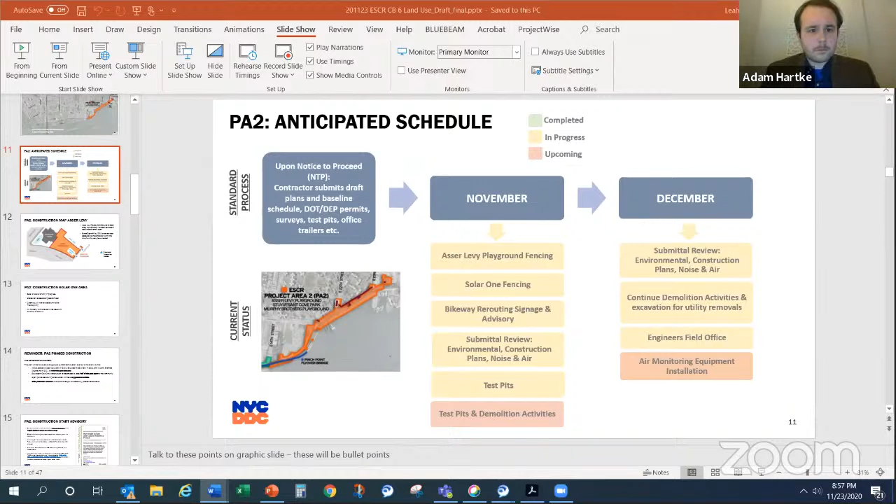Hi, John, do you want to... Oh, sorry, go ahead. Is that Melissa? Yeah, it looked like it. Go ahead. Hi, this is Melissa Haldeman from Parks. Yeah, I suppose John could have answered that question.

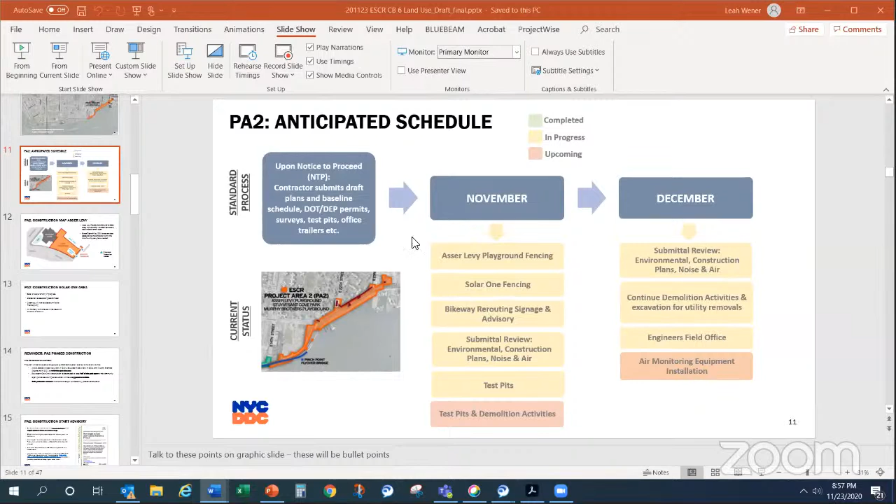On the slide that shows the Asser Levy closures, it shows that the track will be left open. That does include the AstroTurf field. And the handball court will be open. The swing area will not be open. The rest of the playground is being reconstructed under this project. I have to ask the question. So it's open for the time being. Is there a plan to potentially close the track and the handball court in the immediate to near future?

No. Okay. The AstroTurf's in the middle of the track, right? That's just why I got confused for a second. You said it was between, and I was out there. It's in the middle there. Yeah, the turf field. That's going to stay open with the track. Great. But both the track and the AstroTurf, they're not going to be closed in the near to immediate future? Correct, they're going to stay open. A lot of people use that. Absolutely. We heard from a lot of them this week.

All right, question two. Will the pedestrian access paths be wide enough to accommodate social distancing? Sounds like this might be answered more in depth by the 7th. Is that correct? I'm sorry, which specific pedestrian access path? Just whatever is rerouted from the Greenway? Yes. I don't think that would be addressed on the 7th, but as soon as that is worked out with the contractor, we can definitely address that. But COVID is considered at every step of the project, so it will be safe, and I think that's the main point there.

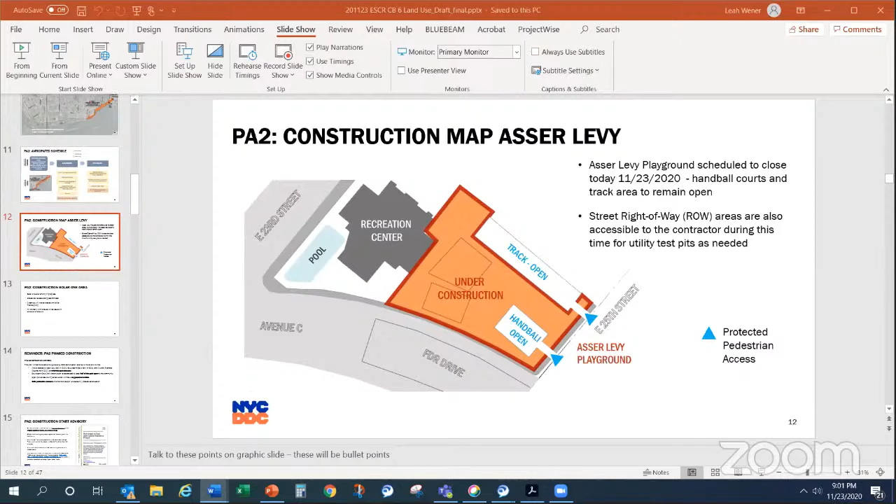And then Jean, back to the December 7th transportation meeting, DOT will be there as well as DDC. We'll be there to focus on the reroute, but in case any questions come up with regards to the ESCR project, we'll be able to answer that too. Excellent, thank you, because I'm sure the pedestrian byways are also going to come up, as well as other transportation aspects of it. Thank you.

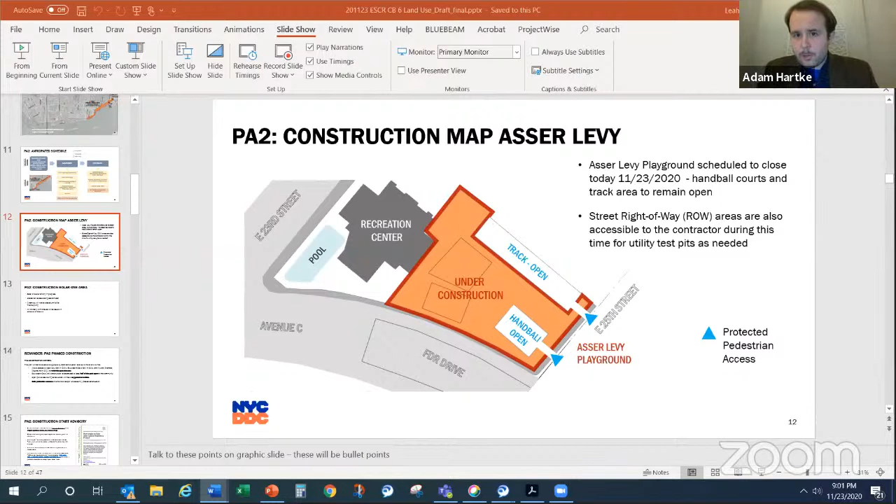So anyway, I'm going to move into the chair's report. There's a couple things to update, but I'll be very brief. I'm sure some of you saw the news this past week. Mr. Solow passed away. So what does that mean for the large field that's been sitting fallow for a decade plus in this district? I don't know, but I got several text messages and emails saying, hey, did you see this?

And the answer was yes. So this may very well be coming up in the distant future. How soon? Unclear. But when we're asked to take action or anything of that nature, we'll be sure to respond to it.

Two, another thing people pointed out to me a lot last week too is that in the instance of helicopter nuisances, apparently our district filed many hundred, maybe thousands of noise complaints from helicopters within Manhattan. And most of these helicopters were not originating from CB6, from our heliport, but rather flying over from New Jersey or things of that nature. I know Lou's brought this up a lot in the past.